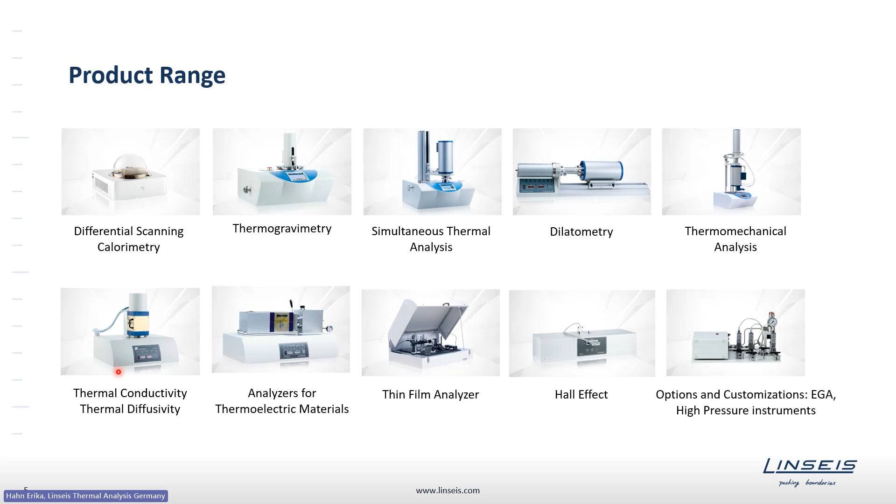Today's webinar will be structured as follows. First of all, there will be an introduction into the topic. Then we will have a look at each of the methods we offer a little bit more in detail: the laser flash, the THB, the TIM tester, the heat flow meter. In the end, I will summarize that and give a guide on how to decide which method is the best one for the material. And in the end, I will show the outlook for the thin films and for the next webinar.

So first of all, heat transfer, what is it and how can it happen? The heat transfer in materials can be grouped into three groups: radiation, conduction, and convection. Radiation is the emission of electromagnetic waves. All materials radiate thermal energy.

And there's also the convection happening mostly in gases or liquids. Convection is the particle stream in heated liquids which carry the thermal energy. A good example here is a heater with the water inside, or the Gulf Stream using convection for being able to carry thermal energy.

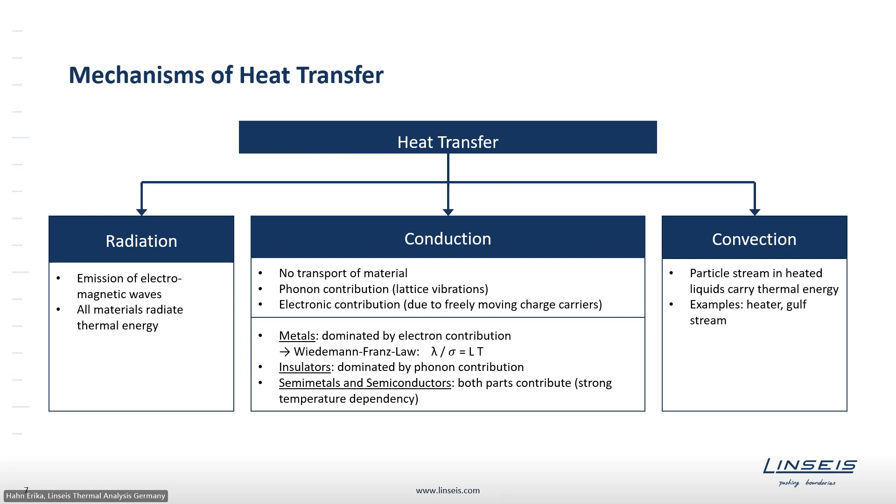A very helpful picture to group or to understand the three mechanisms of heat transfer a little bit better is this one here. So here you can see the mechanisms of heat transfer shown in this picture, where we have this fire pit using radiation to heat up the pot with some water in there. Within the water, the heat is transferred via convection mainly, and after a longer time, also the handle here of the pot will get warm. That it gets warm is happening due to conduction, so the thermal conduction of the pot transports the heat also towards the handle.

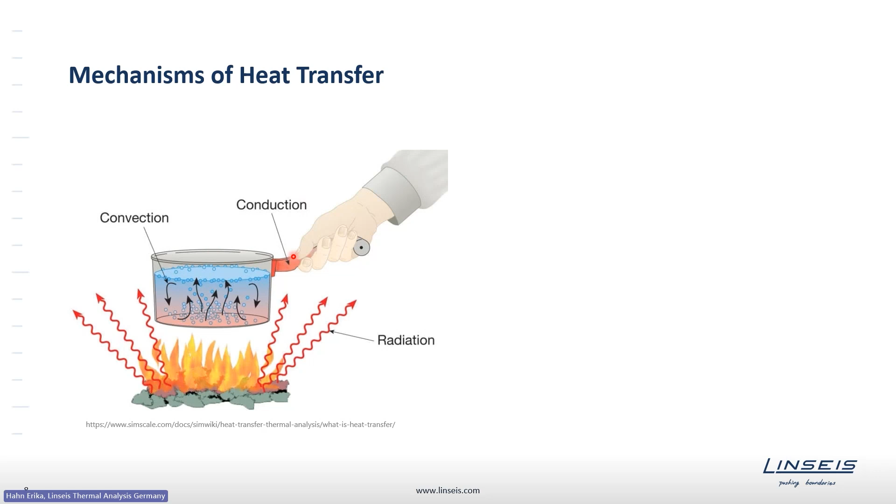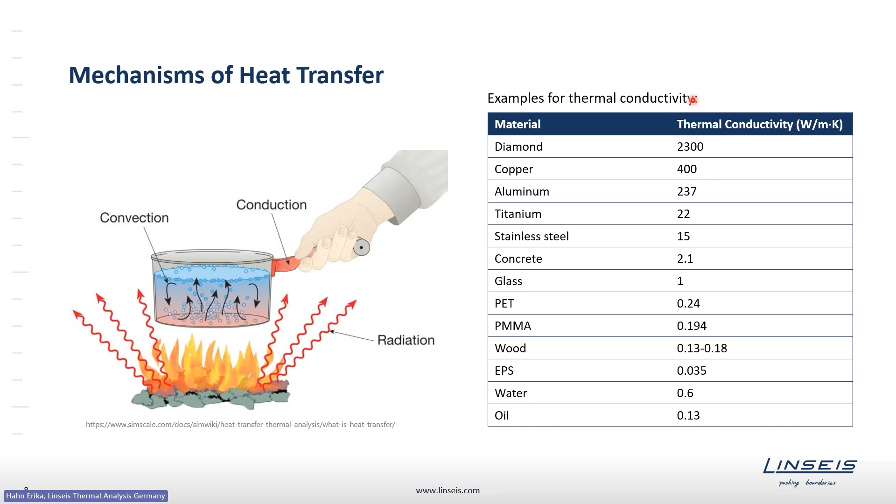So we will focus mainly today on thermal conductivity as well as thermal diffusivity. Here you can see in this table some examples for thermal conductivity, where you can see that the range is very huge. So, for example, insulation materials have a thermal conductivity even below 0.1 watt per meter Kelvin, whereas metals have a quite high thermal conductivity, and diamond is one of the materials with the highest thermal conductivity of about 2,300 watt per meter Kelvin. So it is a challenging task to be able to measure all of these thermal conductivities.

So, as already mentioned, we will focus today on thermal conductivity and thermal diffusivity. This slide and the next one should help to understand what is the difference between both. So, the thermal conductivity of a material is a measure of its ability to conduct heat, so a portion of thermal energy, and the equation can be seen here, so that you need the heat flow through the sample and the size of the sample, as well as the temperature gradient established by the heat transport.

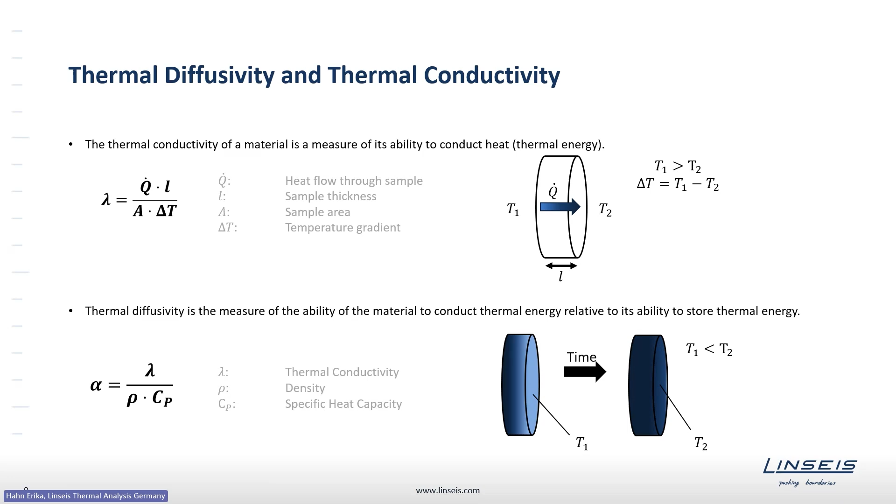The thermal diffusivity, in contrast, is the measure of the ability of the material to conduct thermal energy relative to its ability to store thermal energy. So here we already see that the thermal diffusivity is linked to the thermal conductivity, and more or less you observe how fast a temperature difference is propagating within a material. So this is summarized here as well. The thermal diffusivity, with the unit meter squared per second, is the propagation of a temperature difference in the material, and the thermal conductivity, with the unit watt per meter Kelvin, is the propagation of a heat difference in a material.

So both of these properties are directly linked to each other by this equation. This is often used in practical measurements, where we measure maybe a part of the properties and then calculate the other one using this relation, so that the thermal conductivity is the product of thermal diffusivity, specific heat capacity, and density. The key point here is that all of these properties are temperature dependent, so one needs to perform temperature dependent analysis of each individual property to have the most precise result in thermal conductivity.

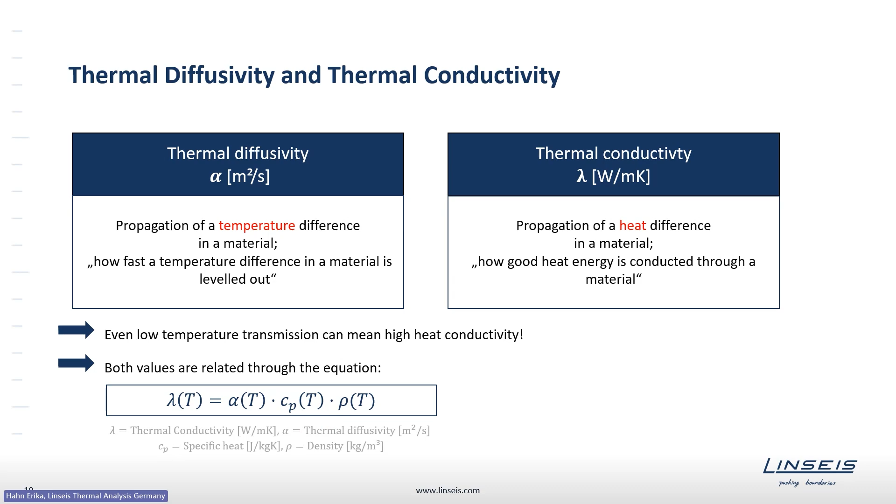But why is it so important to know the thermal conductivity? The thermal conductivity is a very crucial parameter for the design of a device. So especially if you're planning some heat management, it is needed to do some simulations to find out which materials are in contact with each other and how the heat is propagated. So for that, mostly simulations are done in the end, where one needs the material parameters to be able to do the simulation. Also, simulations of casting, solidification, and sintering processes need a thermal conductivity.

So here is an example where you can see a material where the thermal conductivity depends on the thermal pretreatment. You see different classes of material and different pretreatments, with thermal conductivities ranging from 20 to about 45 watt per meter Kelvin, just due to different processes. Additionally, the thermal conductivity is also an indicator of quality. So if you want to build in a material with a certain thermal conductivity to have good heat management, then you of course need to guarantee that this material really has this estimated thermal conductivity. So this is also useful for quality control.

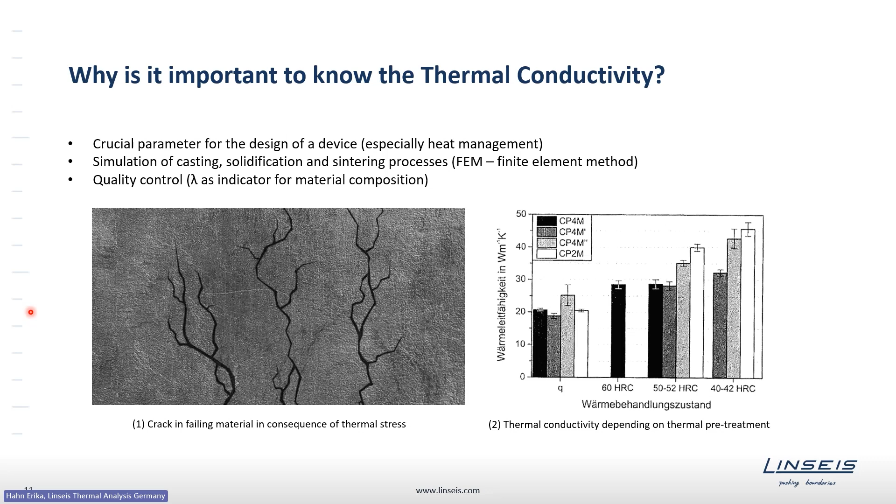Basically, the measurement methods for thermal conductivity or thermal diffusivity measurements can be grouped into two classes. On the one hand, we have the transient methods, where the sample is subjected to a thermal disturbance, and this disturbance is observed as a function of time. On the other hand, we have the stationary methods, where also a thermal disturbance is brought into the material, but we wait until a stable temperature gradient is established through the sample.

So this is also seen here. The transient state is directly looking at when bringing in the thermal disturbance into the material. The steady state methods just take a bit longer, and we wait until there is a constant heat flow through the sample. Looking directly at bringing in the thermal disturbance also gives the advantage of the transient measurement methods, where we have a short measurement time.

Additionally, an advantage of these transient methods is typically that a very broad thermal conductivity range can be covered within one method. Also, a broad temperature range can be established. Disadvantages in case of the laser flash, for example, is that only thermal diffusivity is measured and not directly the thermal conductivity.

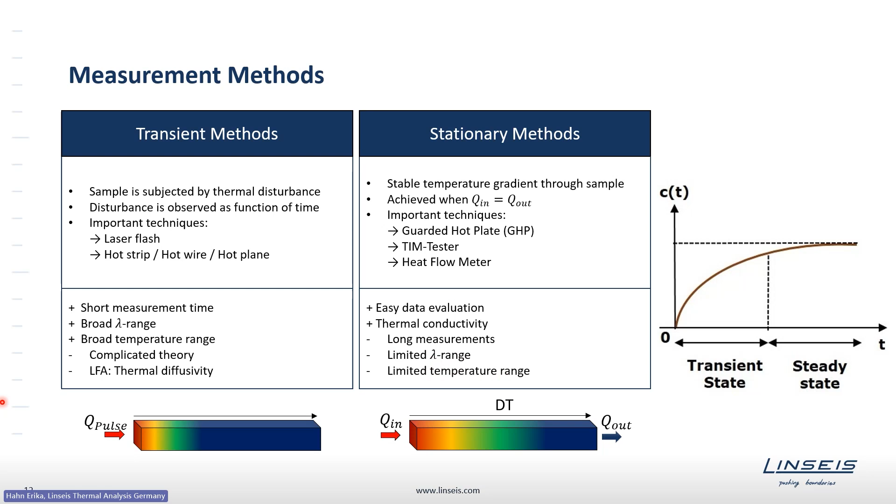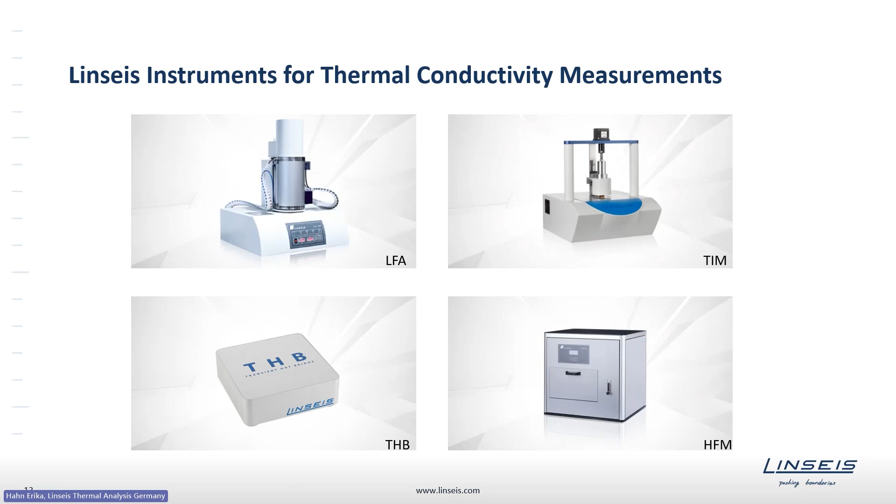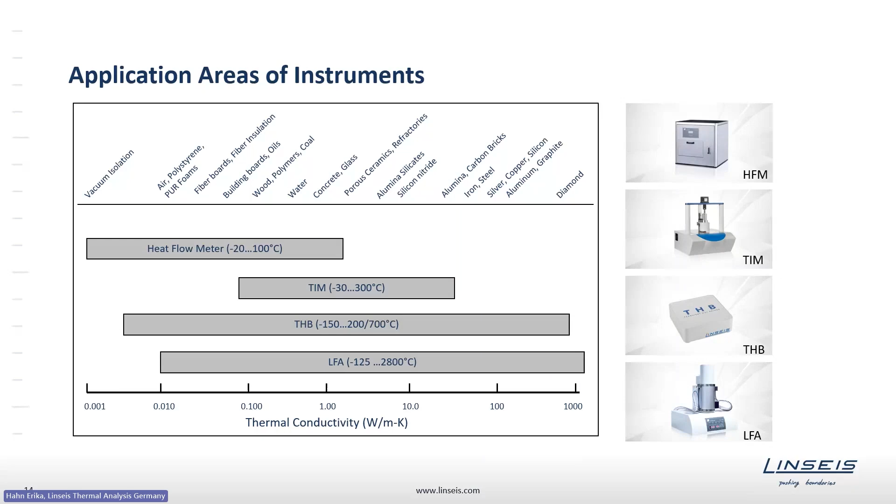So now we start having a look at the instruments a little bit more closely, at the measurement methods, and we start here with the laser flash analyzer. The laser flash measurement is the standardized measurement principle according to ASTM E1461, where a small, thin disk specimen is subjected to a high-intensity, short-duration radiant energy pulse, and the energy of the pulse is then absorbed on the front surface of the specimen, and the resulting temperature rise at the rear face is recorded.

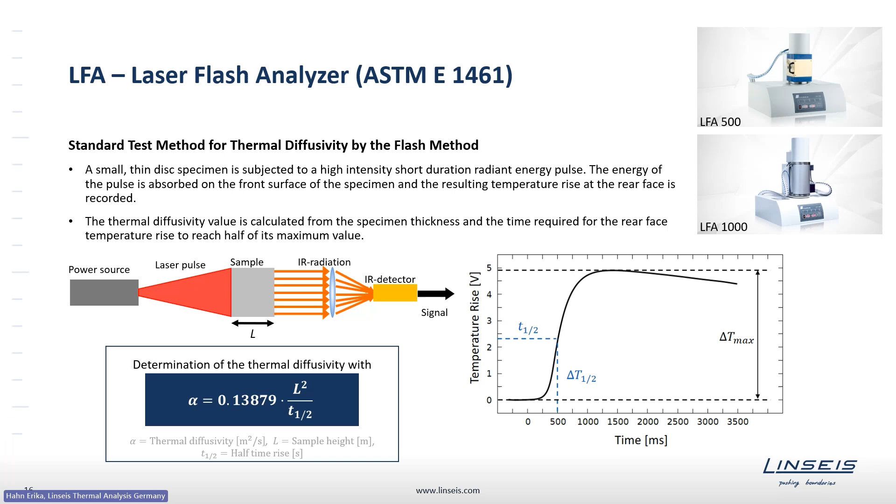This basic setup is realized in the instrument a little bit differently, so it's not horizontally aligned but vertically, where we have on the bottom the power source. We offer here two series, the LFA 500 series and the LFA 1000 series, where the main difference is the power source. On the one hand, we have a xenon lamp, and on the other side, we have a laser source. The xenon lamp has a lower pulse energy compared to the laser source, so it depends on the kind of materials which we want to investigate, which type of model fits the best.

But basically, both setups are similar. So we have on the bottom each the power source, then we have the furnace, where the sample robot is located. So we have here different sample robots, up to 3 or 6 samples. Also the furnace types, there are a lot of different types, going from minus 125 degrees Celsius up to 2800 degrees Celsius, depending on the furnace type.

On the top, we have then the detector. There we also have different options. So either Peltier cooled, so thermoelectrically cooled, or liquid nitrogen cooled. So you already recognize here probably that there are a lot of different options on how to customize, build up a laser flash according to the needs of the application.

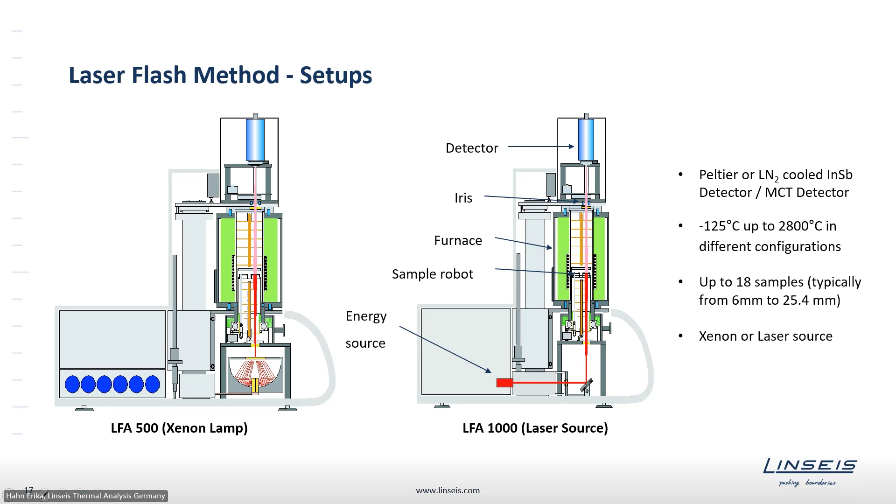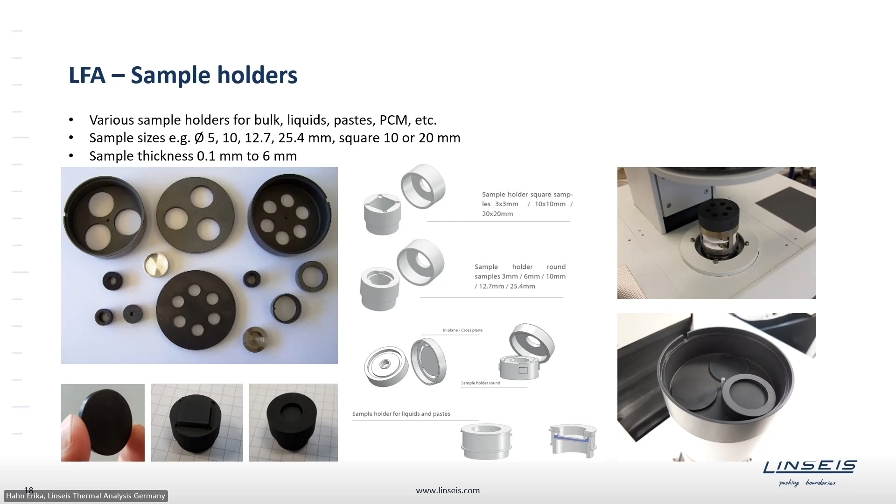So I mentioned before that we use this, let's say quite simple formula of thermal diffusivity calculation with a constant sample thickness and half-time rise. It's not as simple as shown on the first slide of the laser flash, so we do not evaluate the curves graphically, but there are some mathematical and physical models behind that, being able to fit the evaluation model to the data, because basically the laser flash setup assumes an adiabatic state, so the ideal state.

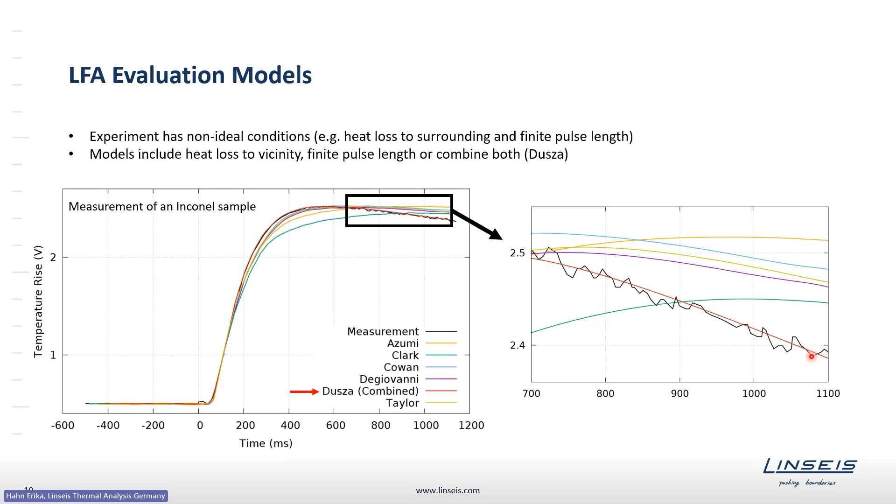But in reality, there are some non-ideal conditions like heat losses from the sample to the surrounding, to the sample holder, and so on. And the so-called finite pulse length effects. This happens for high conductive samples where the measurement time is very low. These both effects need to be corrected, but most of the available models just consider one of these effects. Here, Linseis is quite unique, having this so-called combined model from Dr. Dusza, who considers both effects at the same time, and this is a more or less universal evaluation tool, being able to evaluate almost every kind of material.

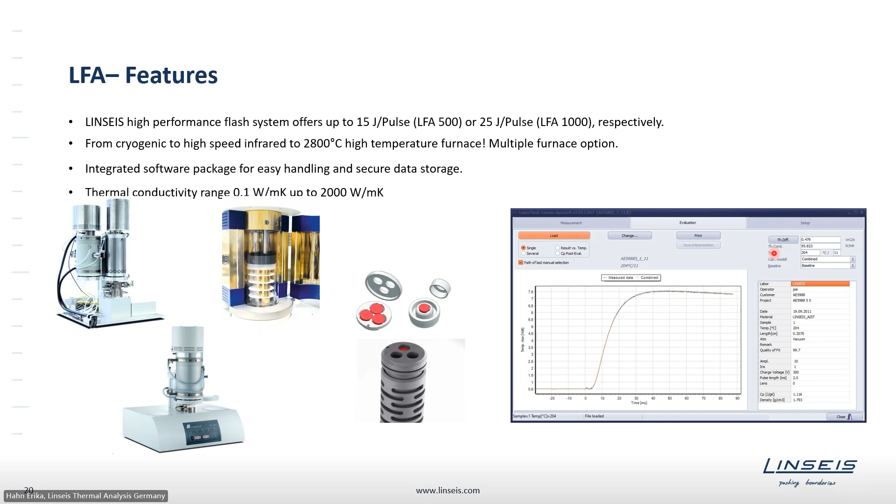Basically, this laser flash is able to measure insulation materials up to extremely high conductive materials. So summarized maybe 0.1 to 2000 watt per meter Kelvin. And this is here a screenshot of the software, where you see the simple evaluation where the software does more or less all for you.

The next instrument we will have a look at is the Transient Hot Bridge, shortly THB. It's also a transient measurement method, and it is based on the hot wire principle. The THB was developed in cooperation with the German Metrological Institute PTB, Physikalisch-Technische Bundesanstalt, in Braunschweig, and the first launch was in 2011. And in 2021, we launched a new version of the THB, so that it is looking like that right now.

The Transient Hot Bridge is a fast and easy measurement tool for thermal conductivity determination. With special sensors, you can also extract the thermal diffusivity using the density. Also, the specific heat capacity can be calculated. We have grouped the THB into the basic, advanced, and ultimate. Each of the models is capable of measuring a different thermal conductivity range.

Basically, the instrument can measure very low conductive materials, also quite high conductive materials. And you can use this tool for solids, liquids, powders, pastes, so more or less the complete range of materials. The temperature range is going from minus 150 degrees Celsius up to 700 degrees Celsius. The basic unit more or less can measure up to 200 degrees Celsius.

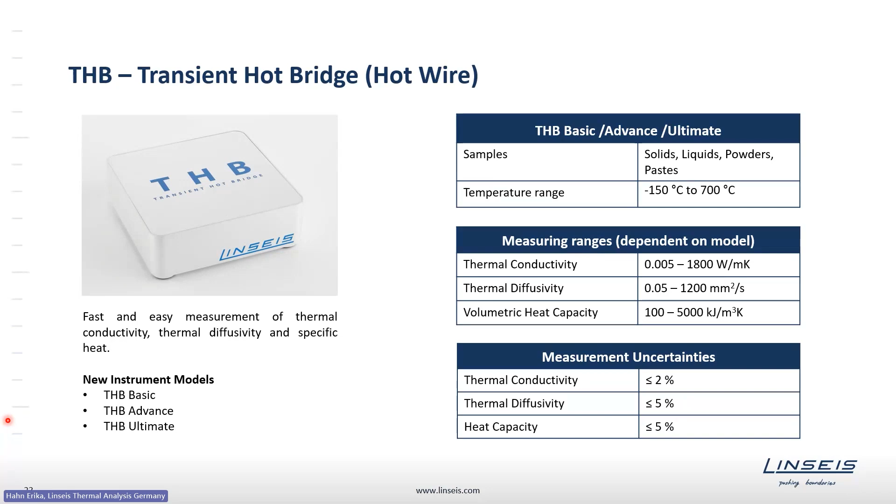Advantages of the THB are that it is a plug-and-play system, so you can disconnect one type of sensor and connect a completely different type of sensor to the same main unit. So you can cover the full range with various sensors using this plug-and-play principle.

The measurement principle I will explain a little bit later, but basically what belongs to sample preparation is having 2 pieces of material covering the sensor foil and fitting very precisely on top of each other so that there is no air in between the sample pieces. And to enhance the contact between sensor and sample a little bit better, we typically compress this configuration using such a sample press or by putting a weight, for example, on top of that.

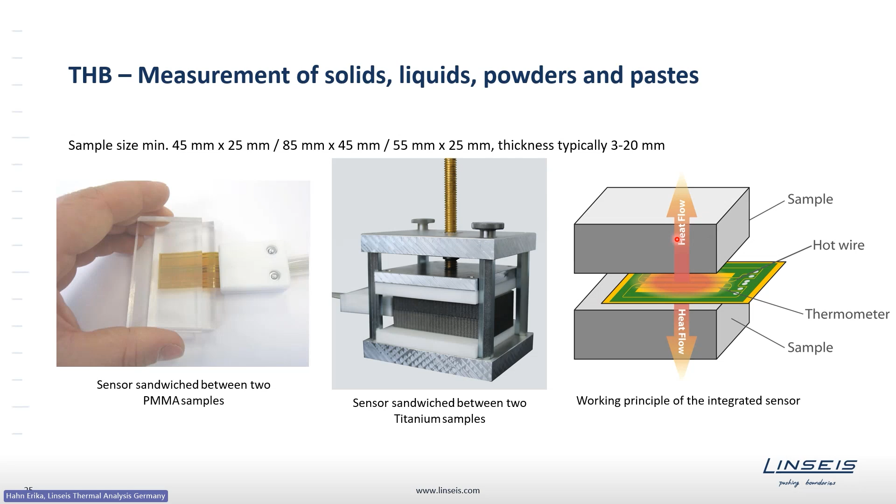In case of liquids and also powders, the sample preparation is quite simple. The easiest way is to just get a beaker, fill it up, and stick the sensor inside. So here is the THB metal frame sensor inserted into a liquid. You just cannot see here the tip of it, just due to the water.

And on the right side, you see our powder sample holder, specially designed for this type of sensor, where you fill up some powder, insert the sensor, and have also the possibility to compress the powder a little bit.

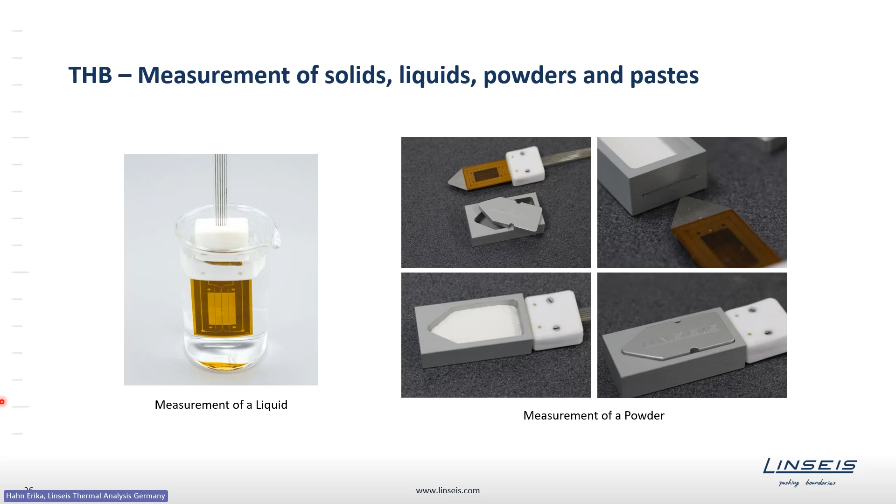All of the previously shown sensor types work according to the same principle, the hot wire, hot strip method, but our sensors are an enhancement of this principle. The design is different compared to the plain hot strip sensor. We have here some meander shapes and the connection to a Wheatstone bridge for better sensitivity within the measurement.

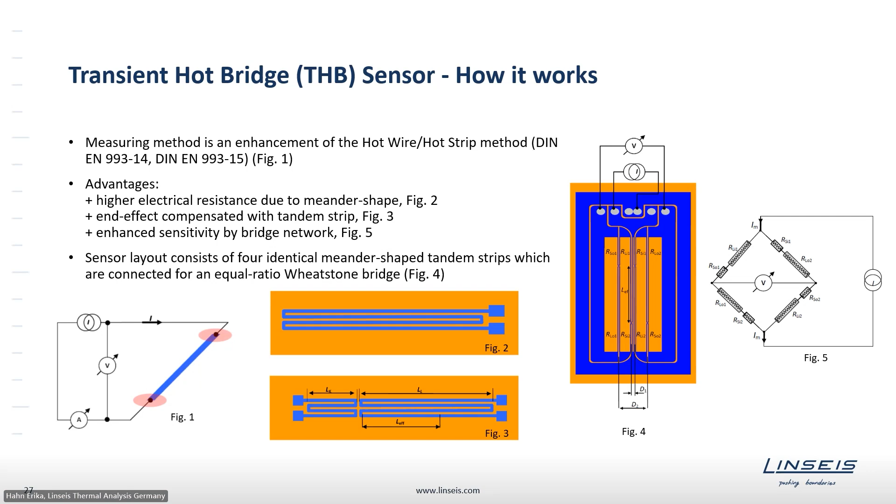This is also where the instrument gets its name: transient hot bridge, a transient measurement method based on hot wire, but connected to a bridge. Here you see again the measurement principle where the sensor serves as a Joule heat source and a resistance thermometer. During the measurement, the sensor emits a constant heating current and also heats itself. The temperature rise over time is then a measure for the thermal properties of the material, where I look at the bridge voltage, as this is directly proportional to the temperature increase of the sensor.

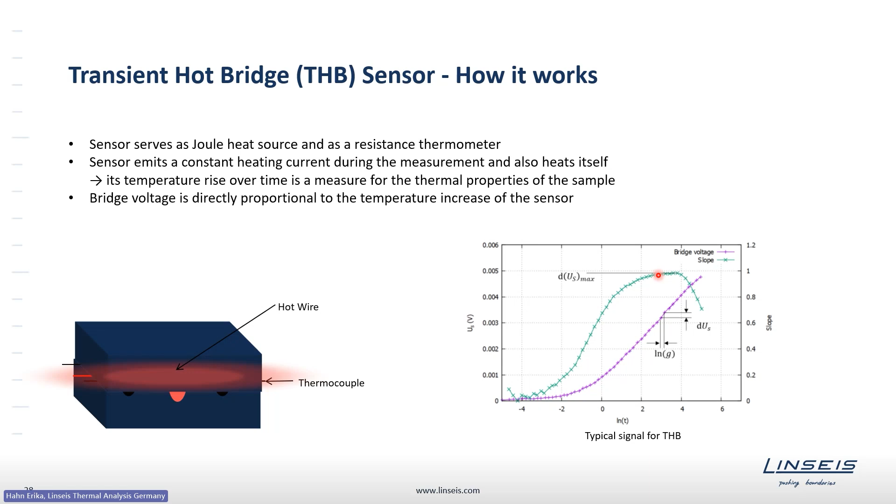Here you can see a typical signal of a THB sensor, where in purple you see the bridge voltage rising with time. For the evaluation, we look at the slope of the bridge voltage to find the maximum, which is the point where we extract the thermal conductivity. The decay afterwards is an indicator for the thermal diffusivity of the material.

Here you see a screenshot of the software. It's very simply designed and more or less a one-button solution. The sensor type is automatically recognized, you can see the temperature reading, you define the number of measurements and press start. But of course, for more experienced users, there's also the possibility within the options to manually modify the measurement time, heating current and so on, so that manual measurements are also possible.

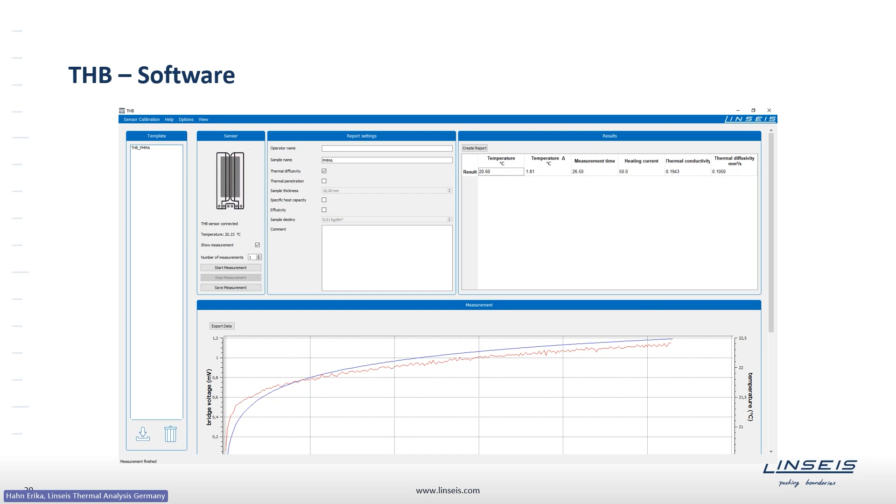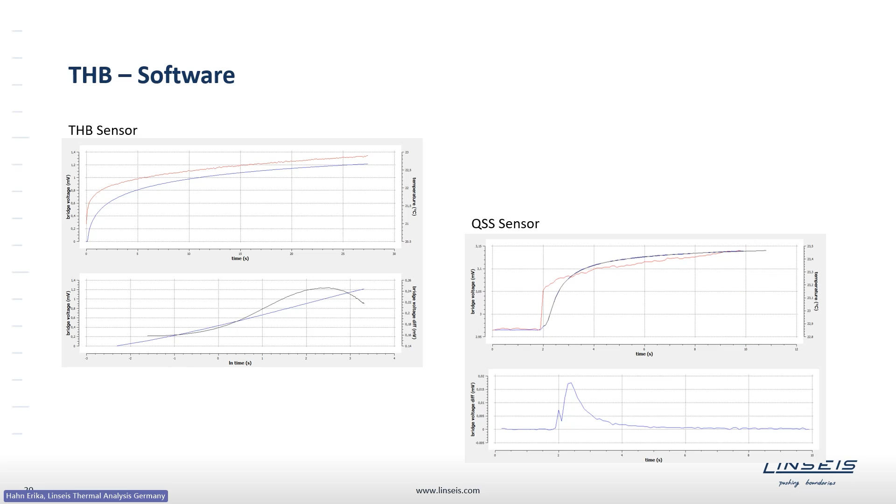Looking quickly at the time scale, the measurement time here is not even 30 seconds. In the lower example it's about 10 seconds, so the THB measurement is very quick to get the thermal conductivity.

For the THB, we also offer a lot of accessories to customize the instrument: many different furnaces, for example the Peltier-controlled furnace going to sub-ambient and slightly elevated temperatures, tools for contact pressure control, and different sample holders. And in case one cannot or doesn't want to cut a large piece of material into two pieces, there is the single-sided sensor based on the QSS principle, where just one sample piece is needed to measure the thermal conductivity, especially useful for highly conductive materials.

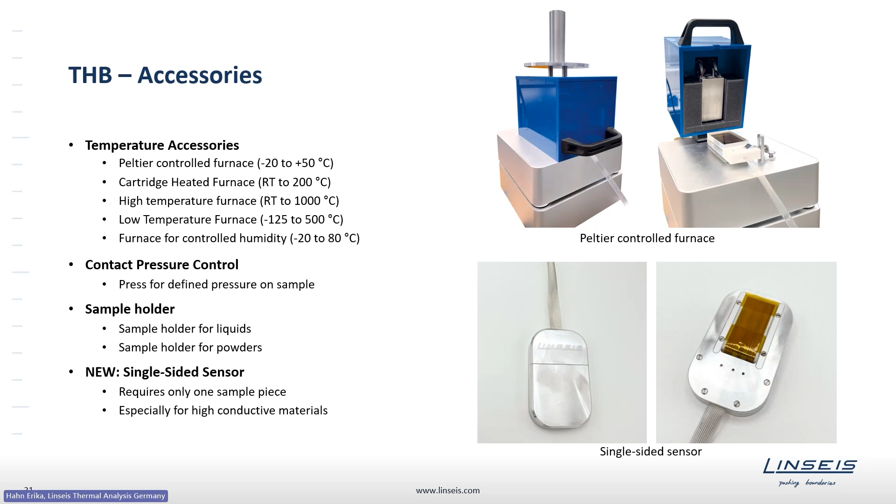So this was the introduction to both transient measuring instruments we offer for thermal conductivity determination, and now we will look at the steady state methods. The first is the TIM tester, the thermal interface materials tester, which is especially designed for thermal interface materials that act as a gap filler or void filler at the contact of two different materials, mostly in electronics. Most of you probably know thermal paste, gap fillers or thermal pads, where the electronics are in contact with a heat sink, to remove heat from the electronics and avoid damage.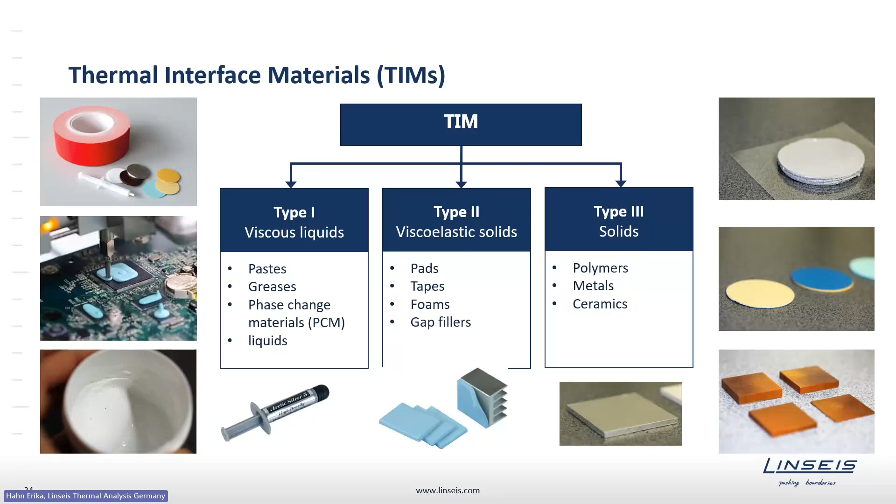These thermal interface materials fall into three groups: type 1, type 2, and type 3. Type 1 are viscous liquids, like pastes, greases, phase change materials or liquids. Type 2 are foam-like, soft materials like pads or gap fillers. Type 3 are solids like polymers, metals, or ceramics. The TIM tester is designed for these kinds of examples. It is also a standardized method according to the ASTM D5470 norm, which precisely describes how the system should be built and how the evaluation should be done.

The basic setup of the TIM tester is having here these plates, or we call them meter bars, where one is heated and the other one is cooled. So the upper one is heated and the lower one will be cooled using an external chiller, and in between the sample will be clamped in. Due to this temperature gradient, a heat flow is established. We'll wait until this heat flow is in a steady state, so it is constant.

When reaching this point, we then use this heat flow to calculate the so-called thermal impedance, denoted here with theta, using the sample area, which is the same as the meter bar area, the heat flow, and the temperature gradient over the sample. And this property we then use for the further evaluation, which we see in a slide later on. The thermal impedance is the sum of the thermal resistances from the top to the bottom, so including here also the contact resistance between the sample and the meter bar.

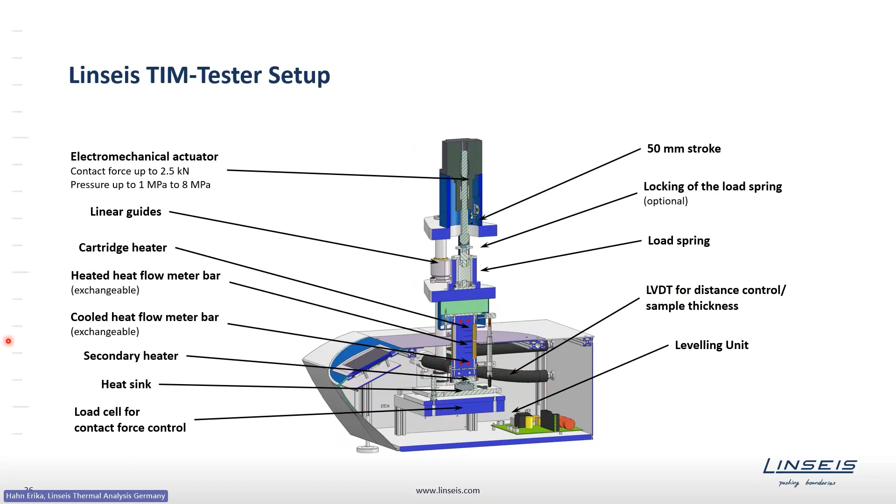The main unit is designed for thermal conductivities between 0.1 and 50 watt per meter Kelvin, and as most of the materials the TIM tester is able to determine are used in electronics, the temperature range of room temperature up to 150 degrees Celsius is realized in the basic unit. With some modifications, one can also reach sub-ambient temperatures going down to minus 30 degrees Celsius. Also, we have a high temperature model going up to 300 degrees Celsius.

So as already mentioned a couple of times, we offer a high level of customization so that also the size of the meter bars can be customized. Typically, we use round or square meter bars, either 25 or 40 millimeter in diameter or side length. There are also different coatings possible with the meter bars, so that this can be customized as well.

Some analyses also need the analysis of a pressure dependency. This can be done using the software so that we can control the pressure with different actuators on top of the instrument. Lower or higher pressures can be realized onto the sample. So with our most powerful actuator of 5 kilonewton, here you see a picture of it, we can realize a pressure of about 8 megapascal onto the sample. Most of the samples we test are quite thin, so that the sample thickness is mostly ranging from 100 micrometers up to 5 millimeters. Basically, thicker samples can be measured as well.

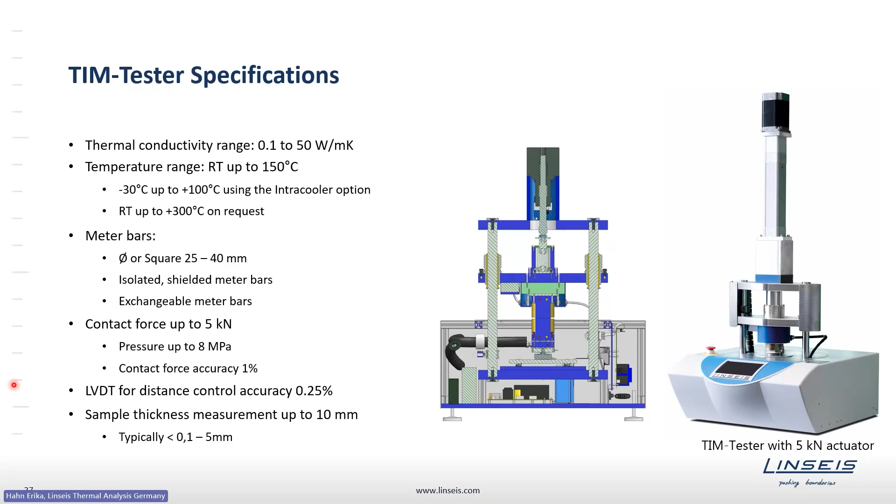Before I mentioned that we measure the thermal impedance of the material, so the sum of the thermal resistances as well as the contact resistance. But in practice, this contact resistance is not of interest or should not be included in the end result. Because of that, the typical testing procedure is the following: we measure 3 different sample thicknesses where we obtain the thermal impedance, plotted in a way like that. So having the thermal impedance in dependence on the sample thickness, we find out that it's a linear relation, as for each sample thickness, the contact resistance is the same contribution.

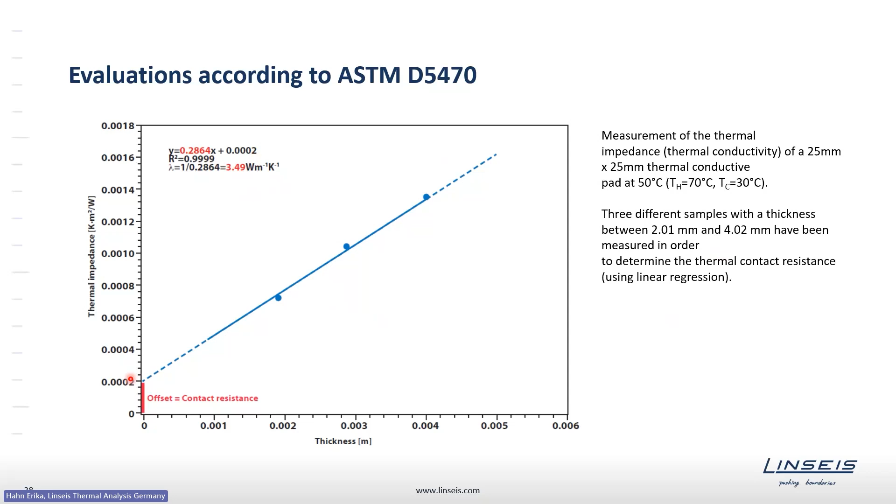This then corresponds here to the offset on the y-axis, and the inverse of the slope of this linear relation corresponds to the thermal conductivity of the material without the contact resistance. So that is a typical measuring procedure. Here you can see an example of a thermal conductivity with about 3.5 watt per meter Kelvin, and we found out here as well the contact resistance.

Here you also see the TIM tester software where we have different fields, setting up the sample, measurement, having a look at the current values during the test, and in the end, there will be an automated report listing all the individual points as well as the graphic representation of the impedance versus the sample thickness, and in the end, the total result.

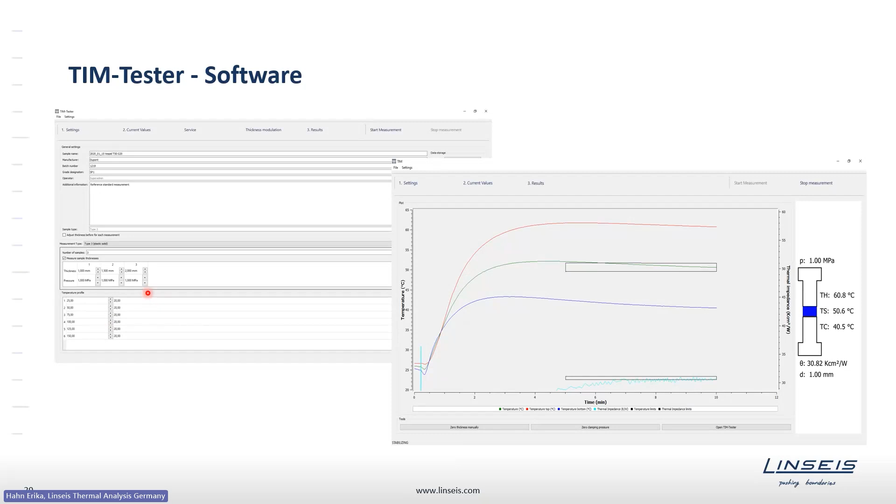The software offers also, which is not shown here in detail, different modes for testing materials. So grouped also into type 1, type 2, and type 3 materials, where each of the measurement modes is specialized to a different material class, so either paste-like, foam-like, or solid.

So coming now to the last instrument we will have a more detailed look at, the heat flow meter, the steady state measuring method, also based on this plate method. The heat flow meter is especially useful for insulation materials, so materials with a conductivity lower than 1 or even 0.1 watt per meter Kelvin. So mostly this tool is for insulation materials, building materials, and so on. It's also a standardized measuring method.

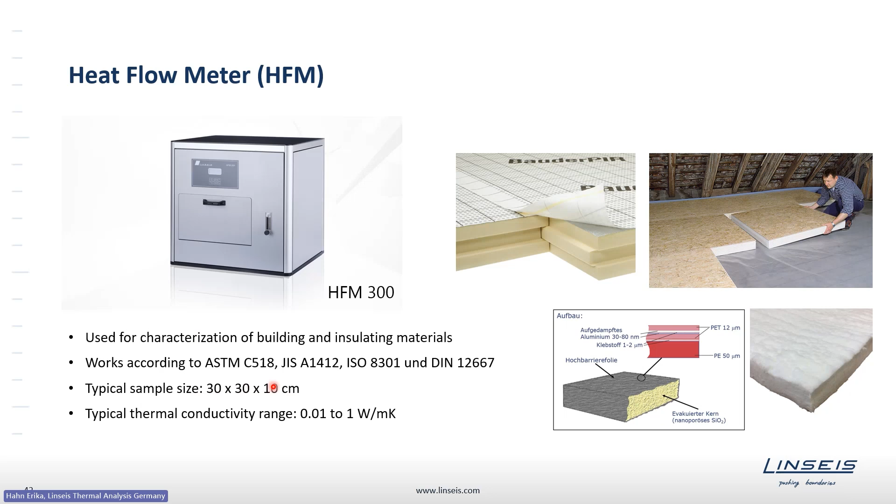And here, as it is a building material, typically larger samples are required. A typical sample size is, for example, 30 times 30 centimeter with thicknesses 1 to 10 centimeter. The measurement principle is basically similar to the one I have shown already for the TIM tester, where we have the two plates. One of them is heated up and the other one is cooled, so that we will have here the temperature gradient over the sample, establishing a heat flow. We wait until the heat flow is constant, so in the steady state.

The heat flow we measure here directly using so-called heat flux transducers, and this signal gives then the information we need to find out the thermal conductivity. We also determine the so-called U factor, which is the heat transfer coefficient, which is often used for building materials, being able to group the different building materials and compare them. Also, the thermal resistance of the material is determined using the heat flow meter.

The difference compared to the TIM tester is, on the one hand, the size of the sample, the thermal conductivity range, and here within the heat flow meter, as we use the heat flux transducers, we need to calibrate this reading with a reference material.

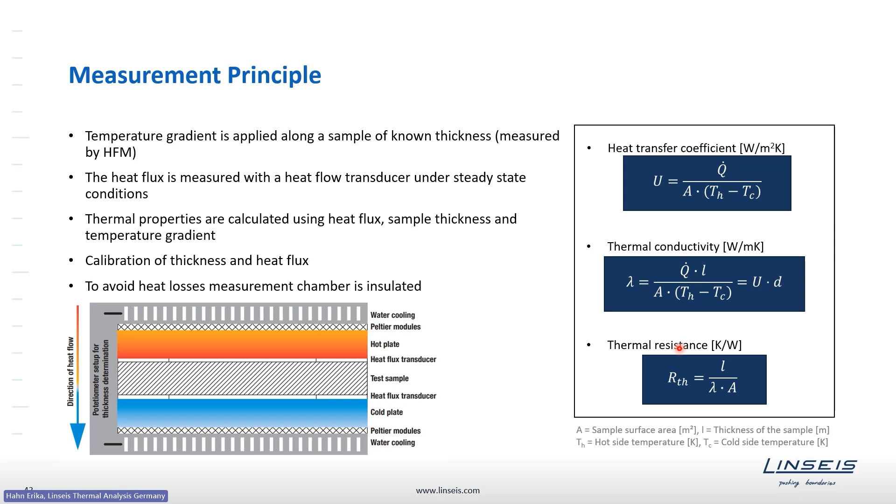So coming now a little bit to the end, we will have a look at a summary of the different instruments. So starting with the transient methods, on the one hand, we have here the laser flash analyzer, which is a very universal tool, being able to measure the thermal diffusivity of insulation materials to high conductive materials, mainly for solids, but with some modifications also useful for liquids, powders, pastes. For example, the laser flash covers the widest temperature range. So depending on the furnace type, one can go down to minus 125 degrees Celsius. But on the other side, with a special type of furnace, we can reach up to 2800 degrees Celsius.

The samples are quite small, typically in the range of diameter 10 millimeter to 1 inch, sample thickness starting from a few hundreds of micrometer to a few millimeter. Mainly the sample thickness range is between 1 to 3 millimeter.

The second transient measurement method we offer in our product range is the transient hot bridge, the THB, which is designed for measuring the thermal conductivity of insulation materials to high conductive materials. Also here solids, liquids, pastes, and powders can be determined. The temperature range is a little bit limited, from minus 150 to typically 200 degrees Celsius. With the ceramic version of the sensors, one can go up to 700 degrees Celsius.

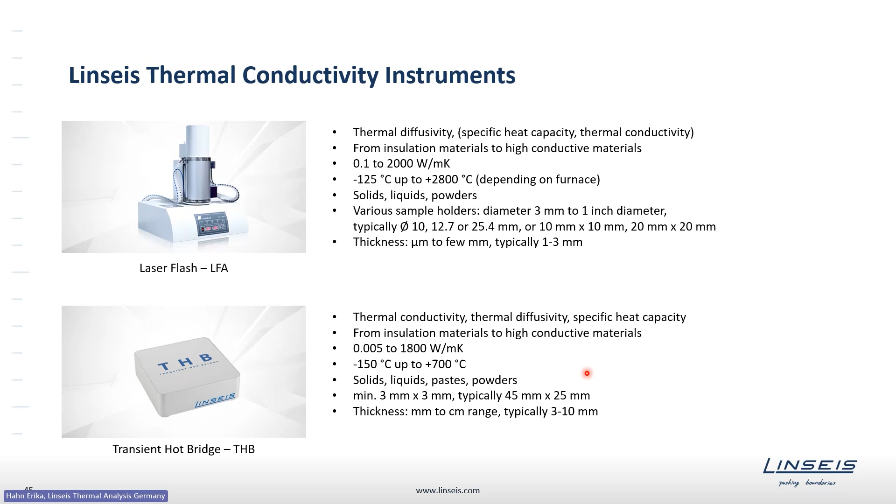Mainly, the samples for the THB are much larger compared to the laser flash, also as you need two sample pieces to be able to perform a measurement. So mainly the sample size is in the 45 times 25 millimeter range. The thickness is also mainly in the 3 to 10 millimeter range.

Going now to the steady state methods, where we have the heat flow meter, which is designed for insulation materials or building materials with a quite low thermal conductivity. We can determine here the conductivity, the so-called U value, and the thermal resistance in a quite low temperature range, but this is the most used one for such insulation materials. Mainly the heat flow meter is used with solids or compressible materials like foams, for example. We need here very large samples in the centimeter range, 20 to 60 centimeter are needed, and also the thickness is more in the centimeter range.

The TIM tester is measuring according to a similar principle. We determine the thermal conductivity of typically thermal interface materials with a moderate thermal conductivity. Temperature range is also quite limited, up to 150 or 300 degrees Celsius, but we can measure here a broad range of materials like solids, compressibles, or pastes, and the sample size is in the range of 25 to 40 millimeter, and thickness is mostly in the lower millimeter range.

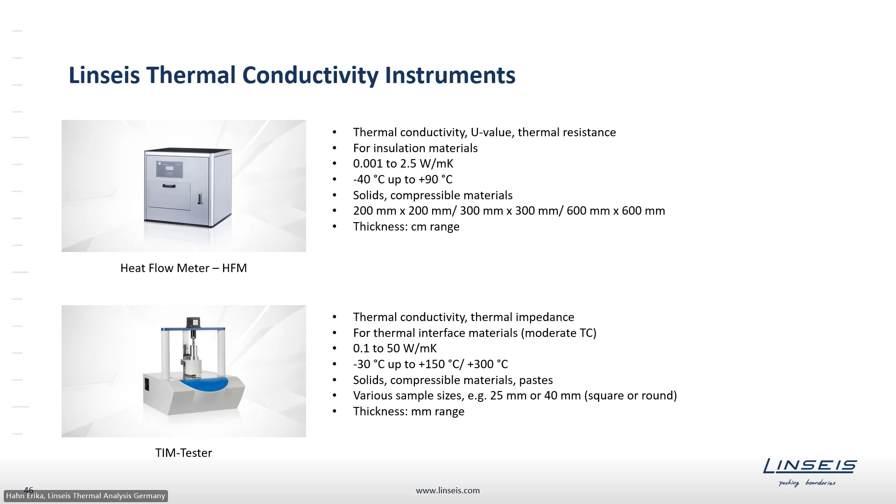I have shown to you now 4 of the instruments we offer for thermal conductivity determination, but of course the most important question is, what type of instrument should I choose when I have a special application? The selection of an instrument for thermal conductivity determination is not that simple and sometimes not very straightforward. So one needs some information to be able to decide which type of instrument is the best suited one for the application. First of all, of course, the type of material should be known.

So if one has a liquid, then the first choice would be the THB, for example, as it is the easiest one to use with liquids. But on the other side, one also has to have a look at the temperature range, as for example, THB in case of a liquid is just limited to 200. If one tests a high temperature oil or wants to go into a liquid phase of a material starting at higher temperatures, then the THB is not interesting anymore.

So one needs to collect the information of the material to be able to determine the right method, the right instrument, and this is what we do here at Linseis. When we get a request for a measurement, we just collect this type of information, so type of material, expected thermal conductivity range, temperature range, if there is a restricted size and thickness of the material, if there are some further measurement conditions, and depending on these answers, we select the type of instrument. For some applications, various instruments should be capable of measuring this kind of material, and then we just use the one which is the most convenient one and does not require the highest effort.

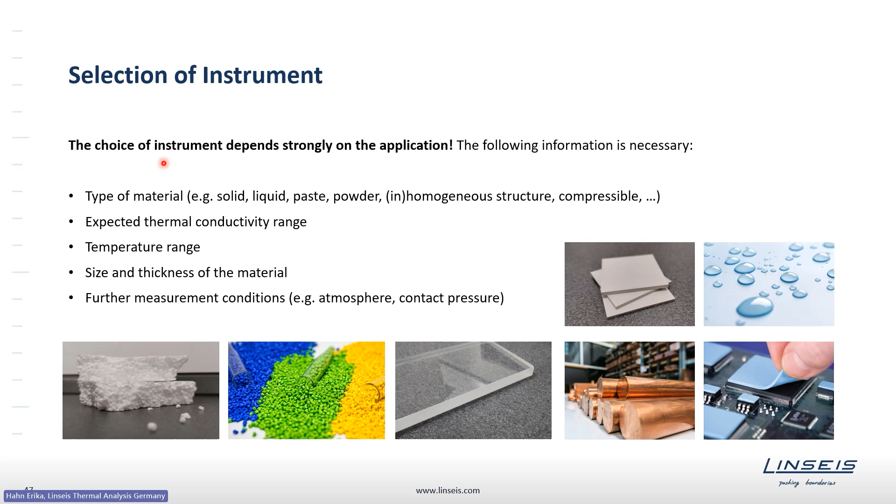So yeah, on our website we also have an indication of which instrument is capable of measuring different materials. So on our website, you find this table where it is indicated by sample type which instrument fits very well, which might fit, and which doesn't fit at all. Also, if you are looking for a specific property like thermal diffusivity, there are some indications which model offers which property. Additionally, also the temperature range, so that this table on our website is a first indicator of which model might be suitable to realize your application. On the other side, our specialists from the lab and from sales will help you in deciding which tool is the best one for measuring your application.

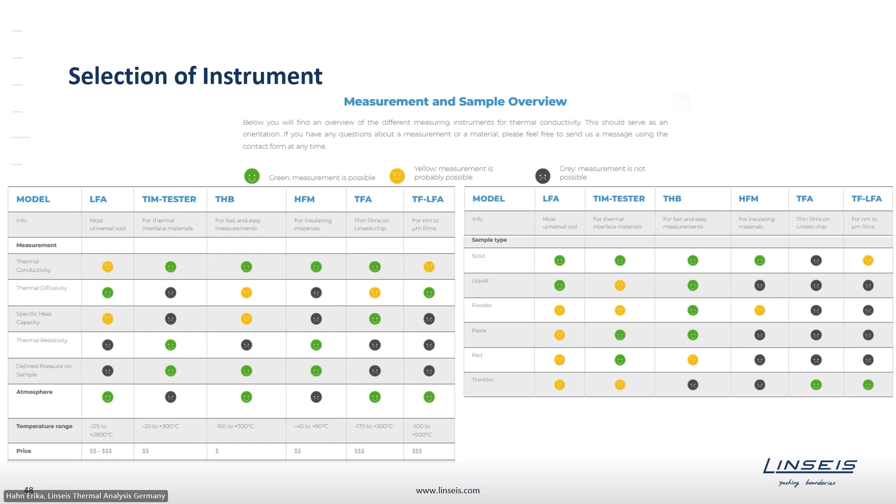As you might have recognized, I was talking mostly about bulk materials, starting from a few hundred micrometers thickness at the lowest, but typically in the millimeter range of sample thickness. Linseis offers also some tools for thin film analysis, so starting from nanometers going to a few hundred micrometers. This analysis is also crucial as the physical properties of thin films might differ completely from the bulk material. So the parasitic surface effects are much stronger due to smaller dimensions and higher aspect ratios. So especially in the semiconductor industry, this investigation of thin films is very important.

This analysis of thin films is more complex compared to bulk material analysis, but we have in total 3 instruments, 3 techniques being able to measure thin films. For example, the TFA using such chips is capable of measuring nanometer scaled materials. The FDTR or TF-LFA, where a sample is here, is useful for measuring semiconductor material with a very smooth surface. And the newest instrument is here, this PLH, standing for periodic laser heating, is especially suitable for polymeric or ceramic or metallic thin films in the lower micrometer range.